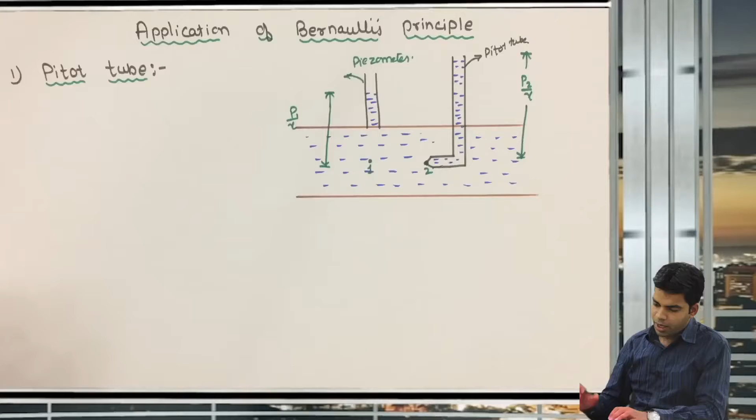At the tip of the nozzle, the velocity is 0, and this point is known as the stagnation point. The piezometer kept here will measure the static pressure head, while the pitot tube kept here will measure the stagnation pressure at this particular point.

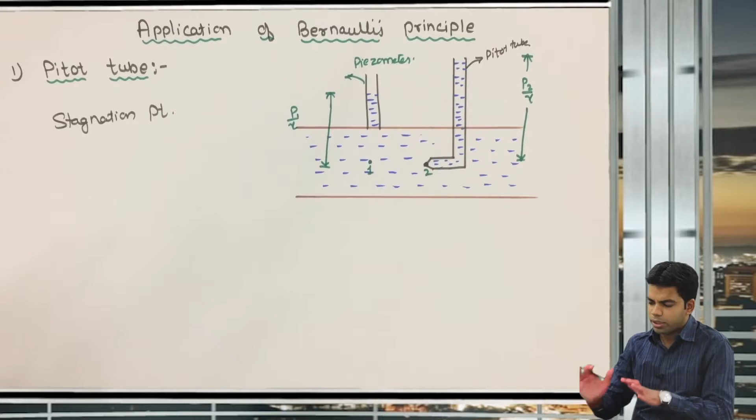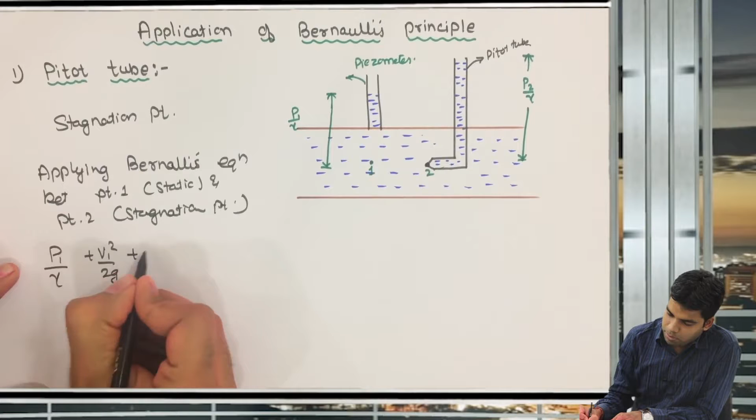Now, how can we calculate the pressure? I will tell you. Applying Bernoulli's equation between these two points, point 1 which is static and point 2 which is the stagnation point: P1 by gamma plus V1 square by 2g plus Z1 will be equal to P2 by gamma plus V2 square by 2g plus Z2.

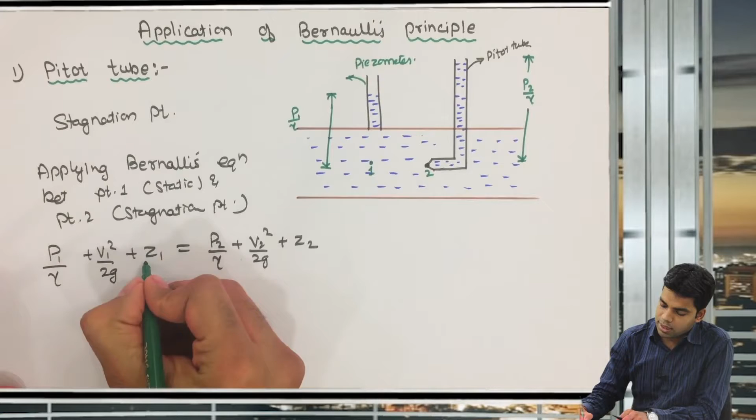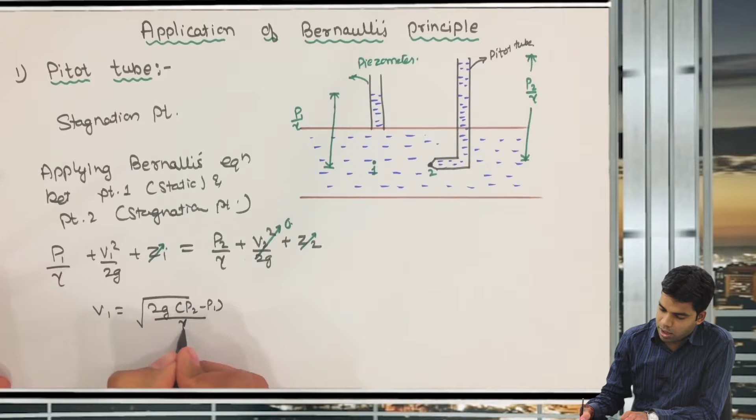Since Z is the same, this will be cancelled out. Second, at the tip of the nozzle, the velocity is 0, meaning V2 will be 0. So we get V1 square by 2g is equal to P2 by gamma minus P1 by gamma, which gives V1 equal to under root of 2g into P2 minus P1 by gamma. This is nothing but the velocity V1.

That means the velocity with which the fluid is flowing at this point is V1, equal to under root of 2g times P2 by gamma minus P1 by gamma. P2 by gamma minus P1 by gamma is H stagnation minus H static, because at this point P2 by gamma is equal to P1 by gamma plus V1 square by 2g.

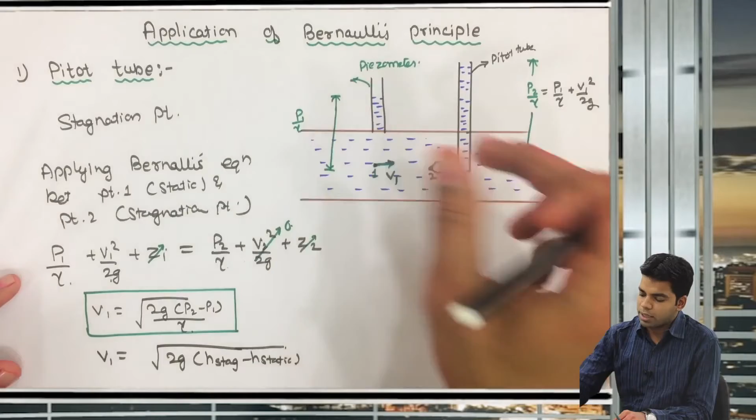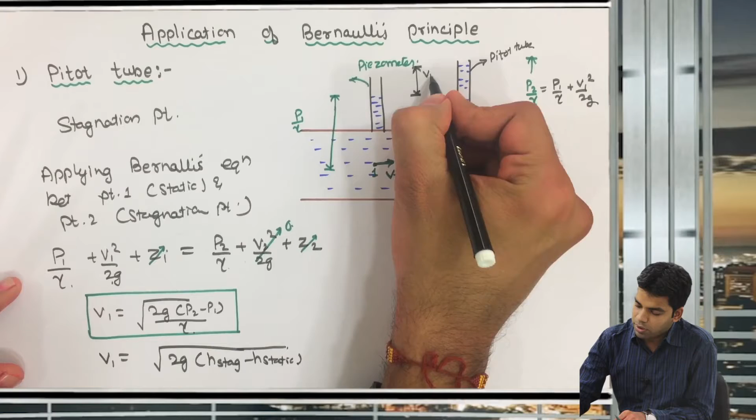This particular height is P1 by gamma, and this is P1 by gamma plus V1 square by 2g. If I subtract this, I get that this particular height is nothing but V1 square by 2g, and this is h. So h equals V1 square by 2g, or V1 is equal to under root of 2gh, where h is the difference of stagnation height and static height.

This is the simple principle of the pitot tube, with the help of which we can measure the velocity. Here we are not considering any loss.

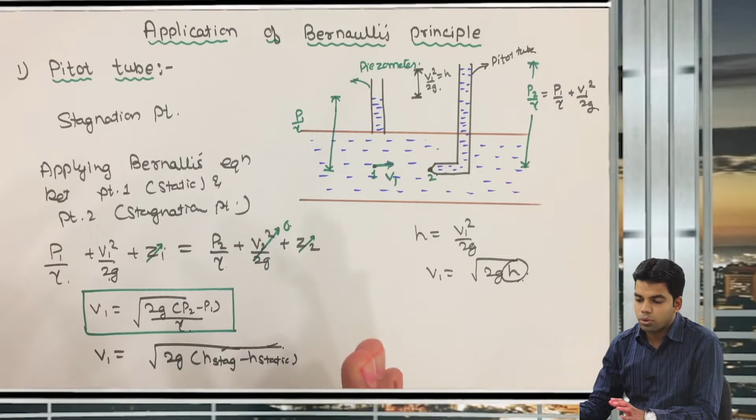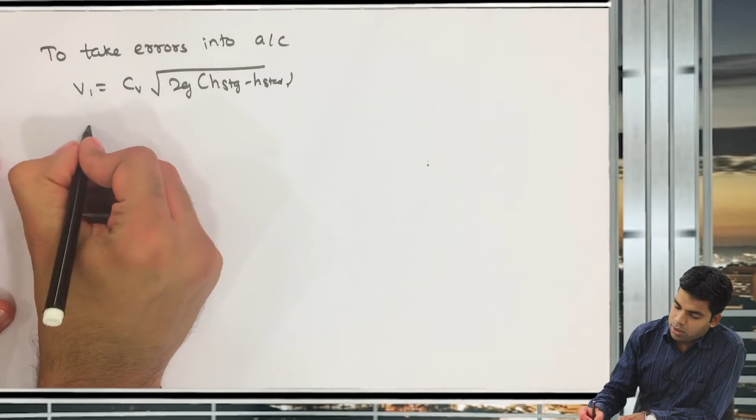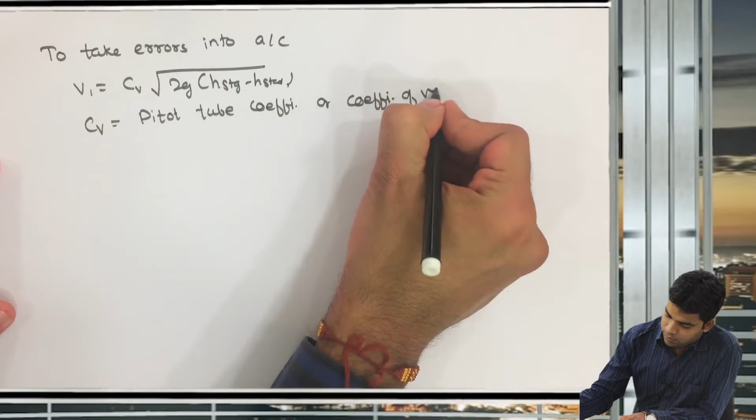If we consider loss, we will have to introduce a coefficient CV to account for errors due to loss of energy. So V1 is equal to CV under root of 2g, H stagnation minus H static, where CV is the pitot tube coefficient, or coefficient of velocity. This H is H stagnation minus H static, or P2 by gamma minus P1 by gamma. This is the simple principle of the pitot tube.

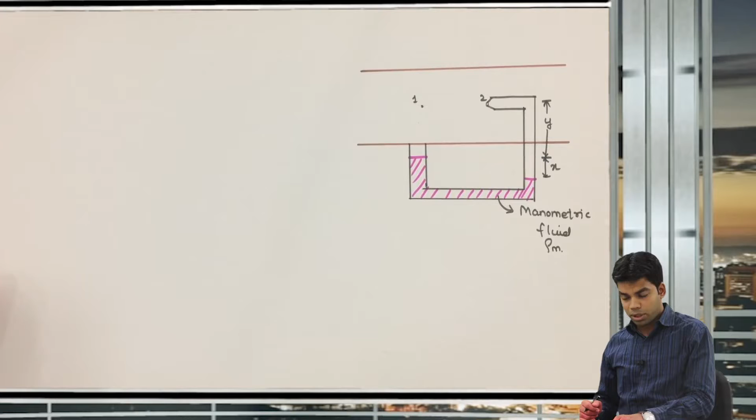Now we will draw another form of pitot tube. This more or less resembles a U-tube manometer, differential U-tube manometer, if you remember. The only difference is that here you have the nozzle where the velocity is getting destroyed, becoming 0. So how can we determine the velocity with the help of this?

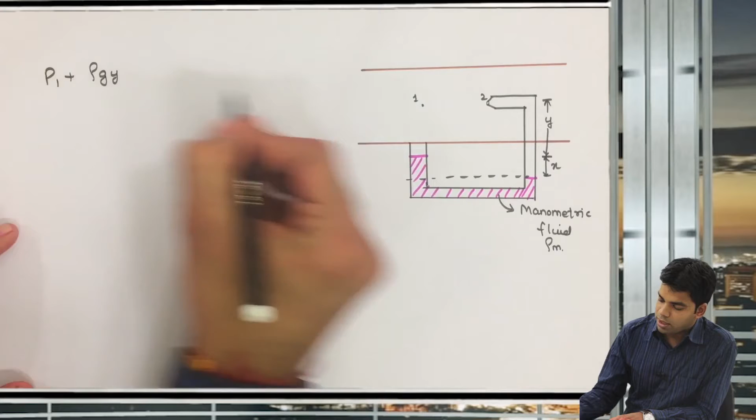We will equate the pressure at this particular level. The pressure here will be P1 plus rho g y, where rho is the density of the flowing fluid and y is the height, plus up to level x with density rho m, giving rho m g x. This equals, at this level, the total pressure P2 plus rho g times x plus y. We have already seen the differential manometer, and here we have equated the pressure at this level.

Now, dividing by rho g, this can be written as P1 by gamma plus rho m by rho into x, which equals P2 by gamma plus x, since the rho g y terms cancel out. Further, this can be written as...

P2 by gamma minus P1 by gamma is equal to x into rho m by rho minus 1. Now further, P2 by gamma minus P1 by gamma, because there is a piezometer, is nothing but V1 square by 2g. So from here you will get V is equal to under root of 2gx rho m by rho minus 1.

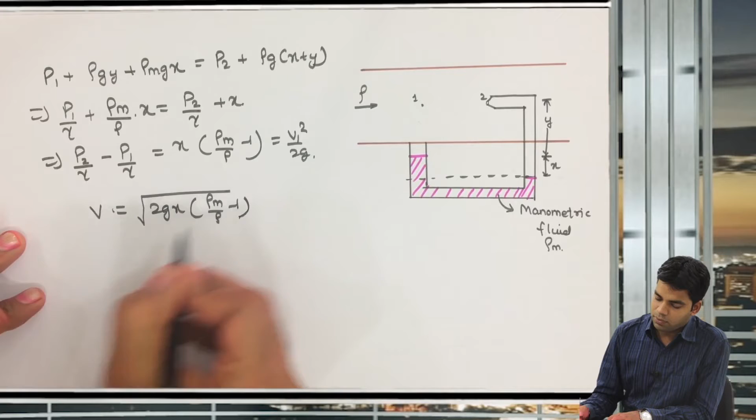Or you can say V is equal to Cv under root of 2gx rho m by rho minus 1, where rho m is the density of the manometric fluid and rho is the density of the flowing fluid. This is how you can determine the velocity.

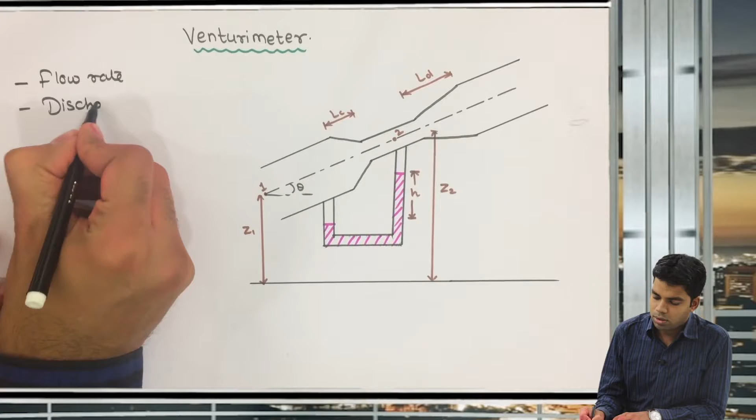Next is a very important application of Bernoulli's principle, that is the venturimeter. This is a very important device, used to determine the flow rate. You can determine discharge or volume flow rate with the help of this venturimeter.

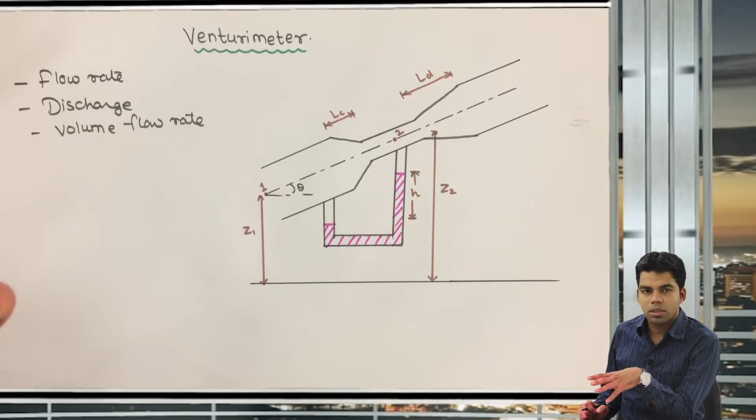Now the beauty of this venturimeter is that it can be used in any orientation, meaning horizontal, vertical or inclined direction. Whether the flow is horizontal, vertical or inclined, it can be measured with the help of this venturimeter.

Second thing, the efficiency of this venturimeter is very high. This is a very precise instrument, the accuracy is very high. Third important thing is the arrangement here.

We have put a U-tube manometer here, and the area of the throat is less, which is to have more velocity here, because area is less here so velocity will be more.

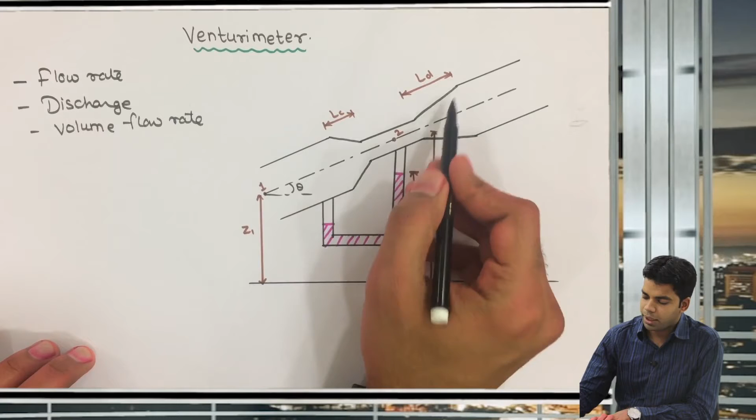Or you can say the cone angle at the diverging side is less, around 5 to 8 degrees, while the converging cone angle is around 15 to 20 degrees.

Now what is the reason behind this? Just understand this carefully. The diverging length is more, cone angle is less; the converging length is less, cone angle is more.

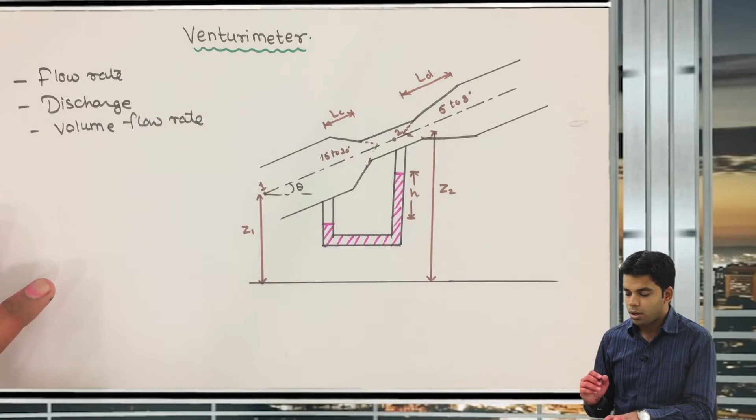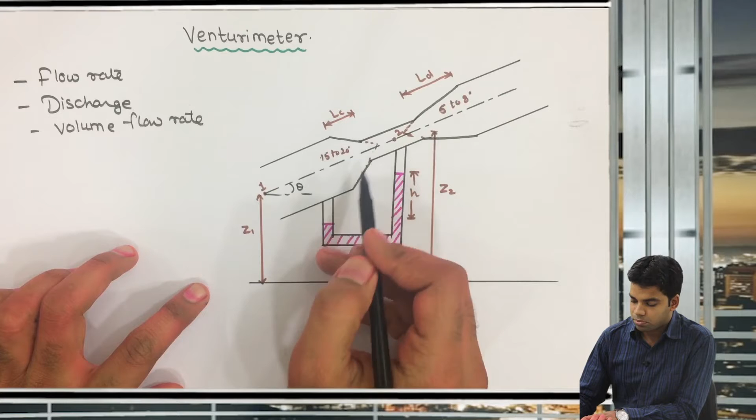There is a difference in pressure, and because of that this manometric liquid will rise here, because the pressure here is less, so the manometric liquid will rise.

Then after that this cone is further diverged up to length LD. Because the cone is now diverging, the velocity will decrease but the pressure here will increase.

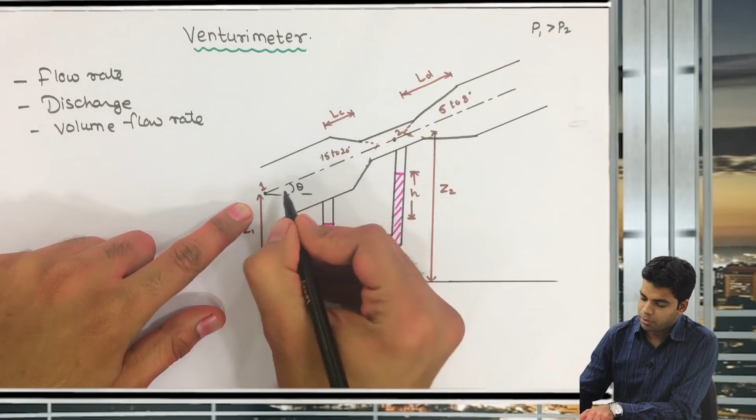So just understand, the pressure at point P1 is greater than that of point P2. The pressure at point 1 is greater than that of point 2.

But the pressure at point 3, if I take point 3 here, is greater than the pressure at point 2, because again velocity decreased so pressure increases in this diverging section.

The convention of flow is always from high pressure to low pressure. So here the flow happens conventionally because the pressure is decreasing, so from high pressure to low pressure the flow can easily happen.

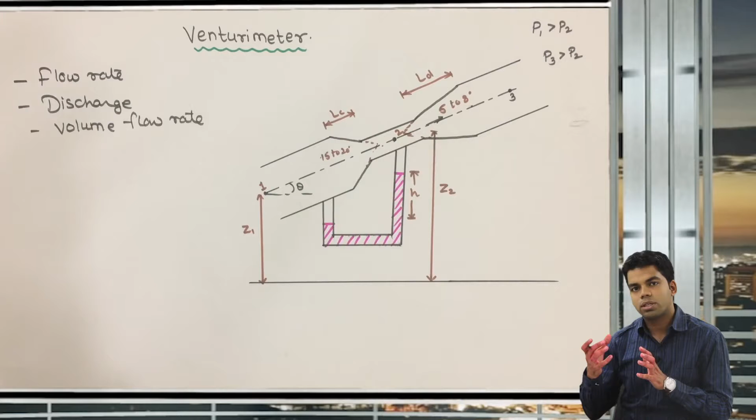The pressure is decreasing in the direction of flow, so that decrease in pressure will further help the flow. But what is happening here is the flow is in this direction, while the pressure in this direction is increasing, yet the natural tendency of flow is from high pressure to low pressure.

So what happens is, because the fluid elements stuck to these particular walls have very less velocity there.

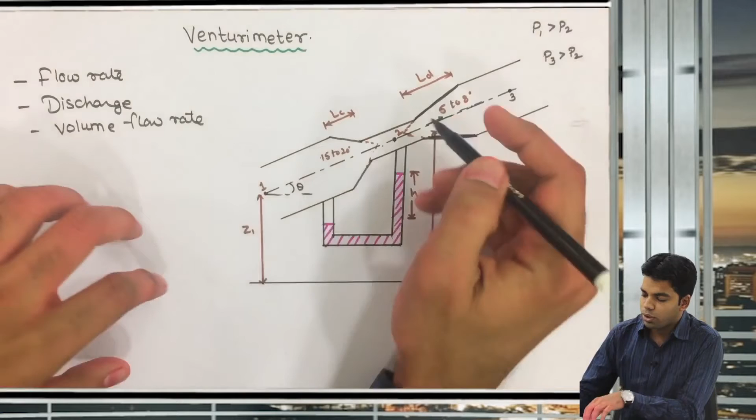The fluid elements passing through the center are having considerable kinetic energy, so they pass through fully. But the fluid elements near the walls have very low velocity, and because of that the flow tendency will be in the opposite direction, since it naturally flows from high pressure to low pressure. At these two points, since pressure is higher at this point compared to that point, the flow will be opposite near the wall of the pipe.

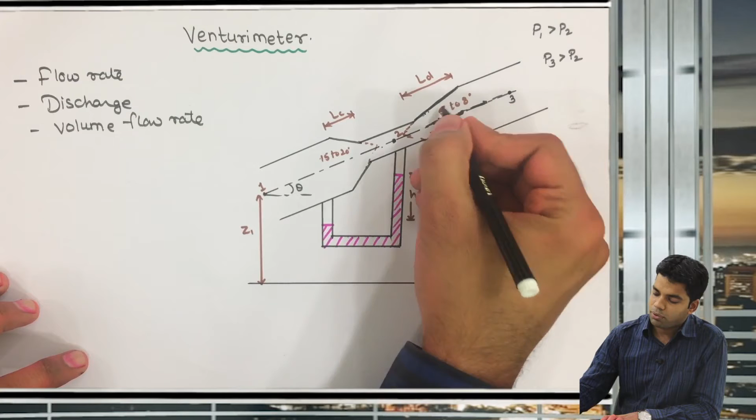The flow in the center of the pipe is dominated by kinetic energy, so it will be in this direction only. But at the walls, where velocity is almost zero, the flow tends to be in the opposite direction, and because of that there is formation of eddies. Natural flow is in this direction, but flow tendency at the walls is opposite.

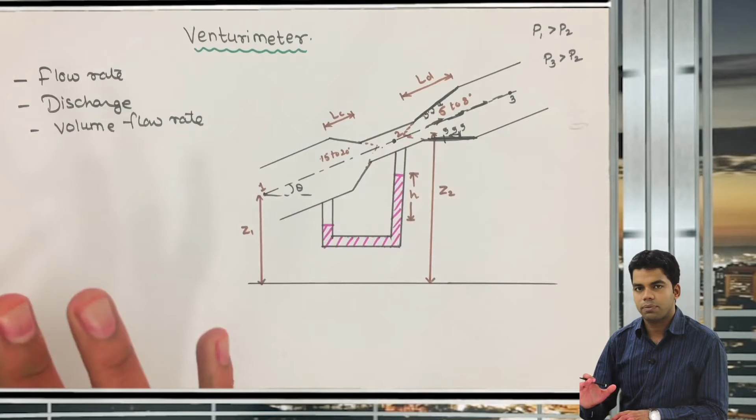So the principle, as I told you, is that we are creating a pressure difference between these two points, and with the help of which we will try to measure the discharge. How? We will apply Bernoulli's principle.

Between 1 and 2, at this particular point total head P1 by gamma plus V1 square by 2g plus Z1, this will be equal to P2 by gamma plus V2 square by 2g plus Z2. Now further you can write it as P1 by gamma plus Z1, minus P2 by gamma plus Z2, this will be equal to V2 square by 2g minus V1 square by 2g.

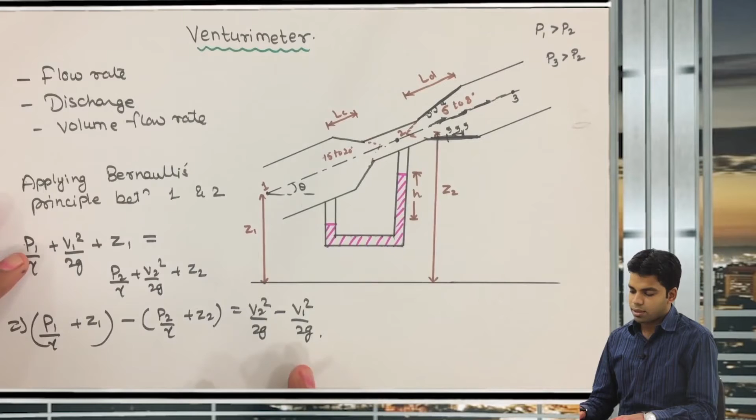Now what is this V2 square by 2g minus V1 square by 2g? This is nothing but P1 by gamma plus Z1 minus P2 by gamma plus Z2, and this is nothing but H1 minus H2. This is piezometric head, so this will be H1 minus H2, or you can write it as H, which is the Venturi head.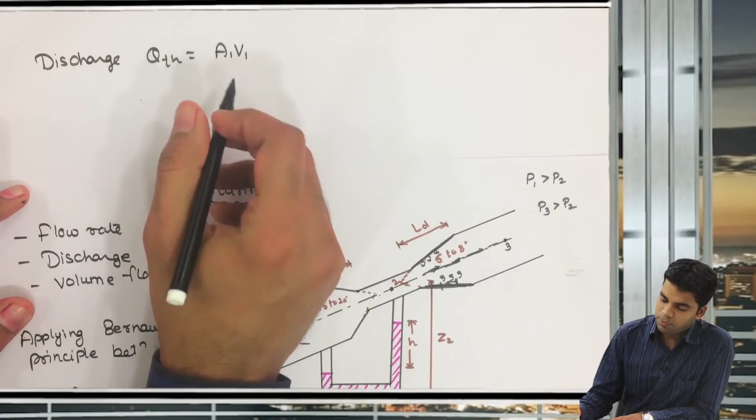Now further the discharge Q, theoretical discharge, this Q will be equal to A1 into V1, area cross section into velocity, or you can write it as this is also equal to A2 into V2. Discharge is same at these two points, so A1 V1 is also equal to A2 V2.

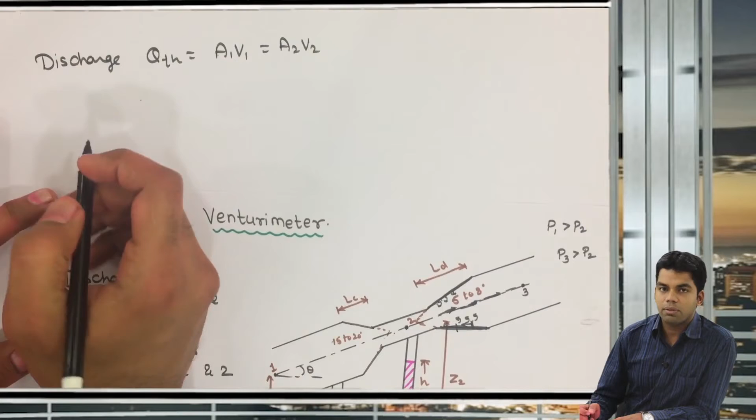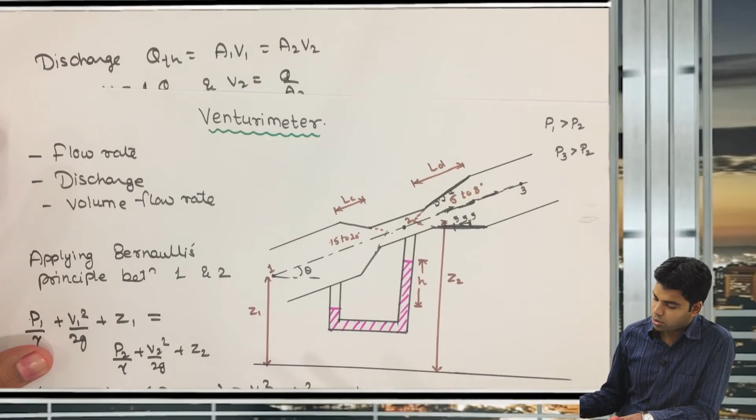Now further this can be written as V1 is equal to Q by A1, and V2 will be equal to Q by A2. Now just put the values of V1 and V2 here in this equation, so we will get H equal to, where V2 is Q by A2 and V1 is Q by A1, this will be Q theoretical square by 2g, and inside we get 1 by A2 square minus 1 by A1 square.

Further this can be solved, and Q theoretical from here will be equal to A1 A2 under root of 2gh upon under root of A1 square minus A2 square. So this is the expression for theoretical discharge.

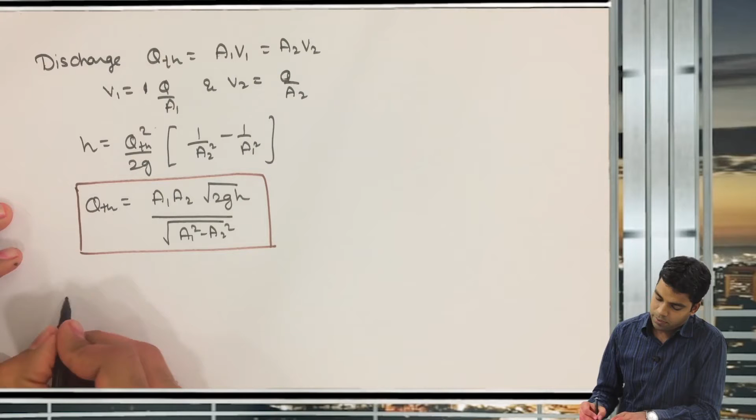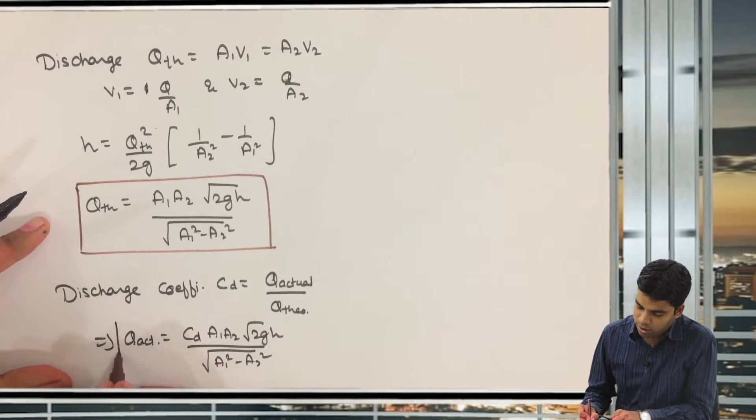Now further there is a discharge coefficient CD, equal to Q actual divided by Q theoretical. There will be a difference between actual discharge and theoretical discharge because of certain losses. So from here Q actual can be determined, equal to CD into Q theoretical, that is CD into A1 A2 root 2gh divided by under root of A1 square minus A2 square. So this is how we determine the discharge with the help of a venturimeter.

And this CD, the value of CD for venturimeter is 0.98, which is the highest for venturimeter. As I told you, this is a very precise instrument.

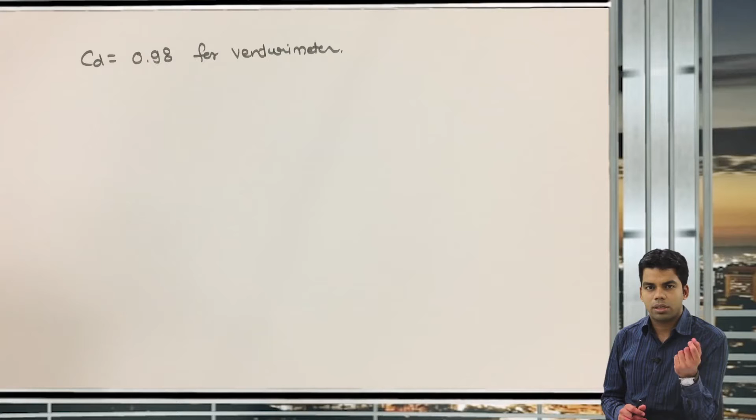There are certain other instruments like orifice meter and rotameter, but the value of coefficient of discharge CD is less there, so those are not so accurate. The venturimeter is very accurate and very costly, while the orifice meter is less accurate and obviously cheaper.

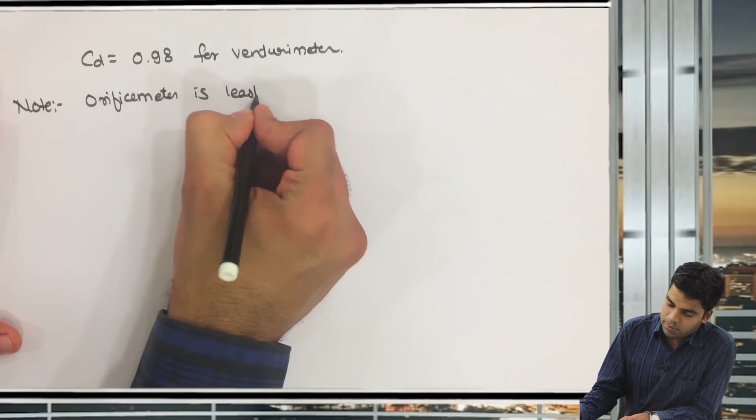So for the orifice meter, you can write down the note: orifice meter is least efficient, with coefficient of discharge CD as 0.6 to 0.7, and these are cheaper.

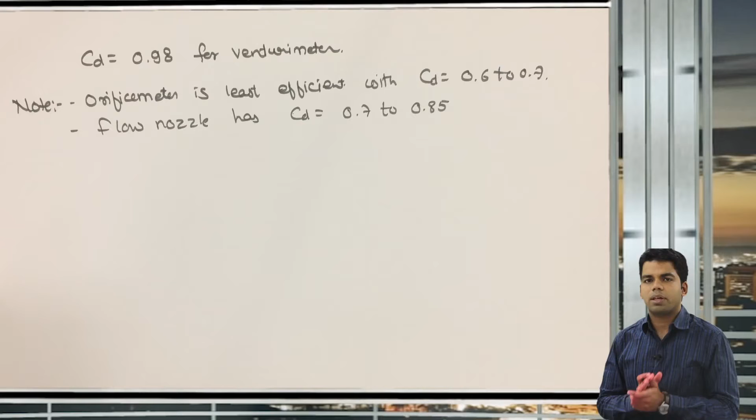Another discharge measuring instrument is the flow nozzle, and this flow nozzle has CD as 0.7 to 0.85. You can see details of the orifice meter and flow nozzle from the book of Modi and Seth. We will not discuss it further since it is not very important from the GATE point of view. Now next, as I told you, the venturimeter is most efficient.

At the same time, it is costly. So the CD, as I told you, here is 0.98.

Next, the rotameter. Another device is the rotameter. This rotameter can be used in the vertical direction. If you want to measure the discharge in vertical direction, you can use this rotameter.

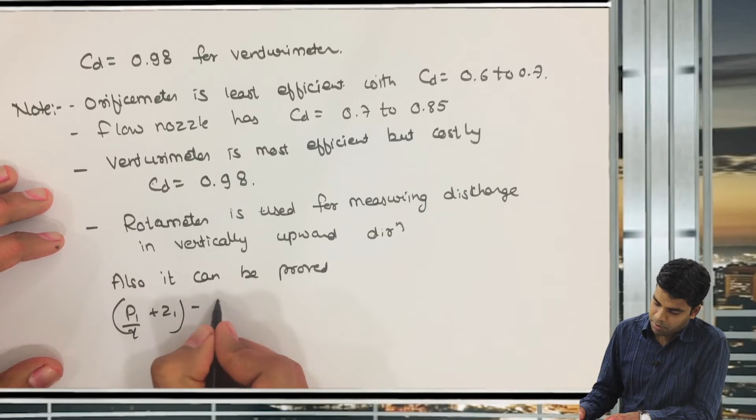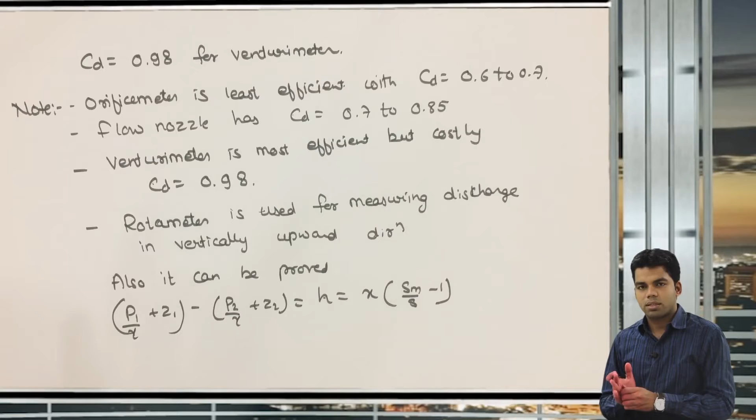Now, this equation which we have proved can also be proved as P1 by gamma plus Z1 minus P2 by gamma plus Z2, this is equal to H, which is also equal to X into Sm by S minus 1. Sm is the specific gravity of mercury, and S is the specific gravity of the fluid. So this is another form for the venturimeter.

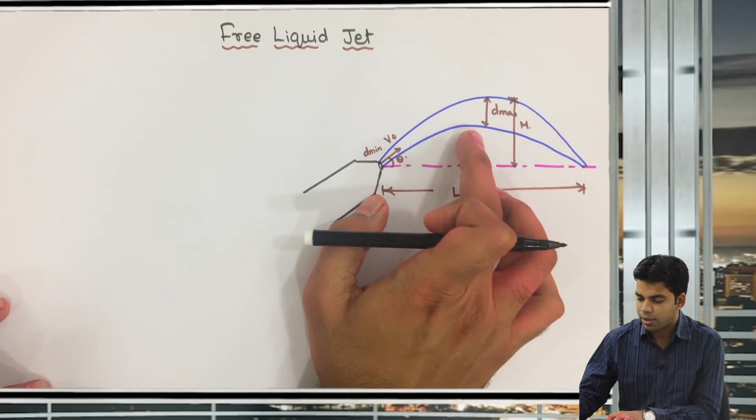Next is the free liquid jet. We are having a jet which is at an angle theta from the horizontal, and it will travel up to a range of length L, and the highest height it achieves is H, as you can see here. We have the minimum diameter of the jet, D minimum, and the maximum diameter at the top, D maximum. So we have to determine the value of L, H, and so on.

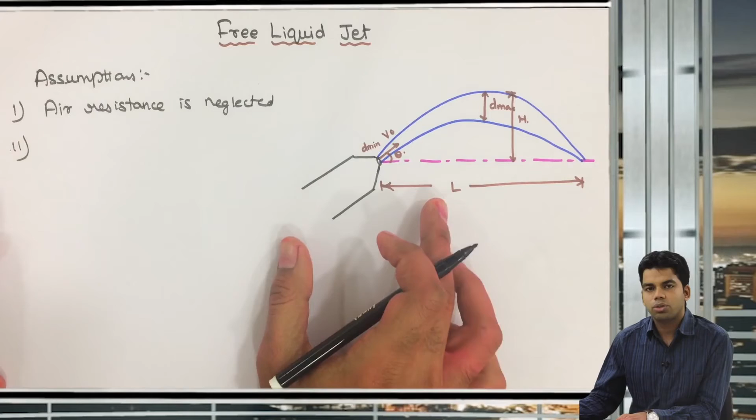So here are certain assumptions. Let us first look into the assumptions. The first assumption is that air resistance is neglected; we are not considering air resistance. Second, the acceleration due to gravity G is constant within the range of the jet.

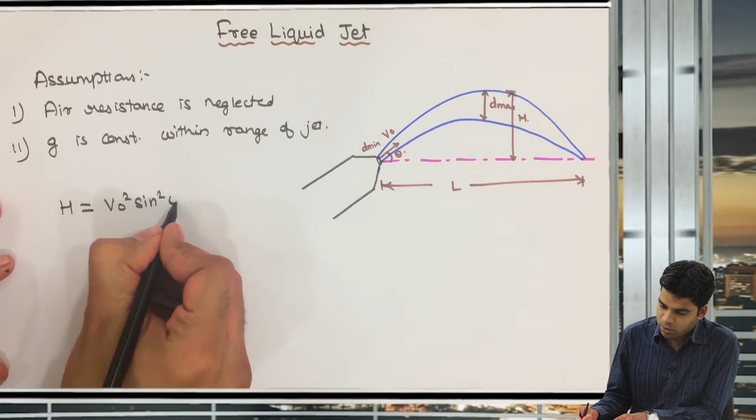The height attained, H, I will directly tell you the formula. This H is equal to V naught square sine square theta divided by 2G. This is the maximum height attained.

Now L, L by 2 is half of the range, and the formula for L by 2 is V naught square sine 2 theta divided by 2G. V naught here is the initial jet velocity, the velocity with which the jet is leaving the nozzle, and theta is the angle with which this jet is leaving.

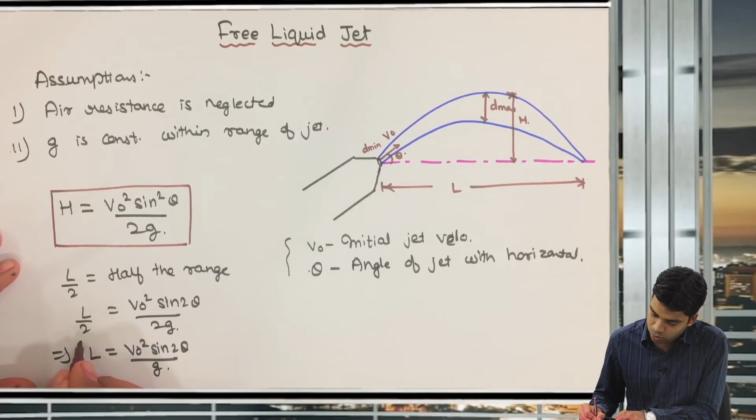With the horizontal. So from here you can get the value of L, the total range, which is equal to V naught square sine 2 theta divided by G. So you have H, which is V naught square sine square theta divided by 2G, and L is V naught square sine 2 theta divided by g.

Now, the horizontal component of this velocity: the velocity is V naught, the angle is theta. So what will be the horizontal component of this velocity? This will be equal to V naught cos of theta.

Now, if I want to determine the time of flight, up to what time this jet will be in the air, for that what I will have to do is: total distance travelled is L, and the velocity in this direction is V naught cos theta. So total distance upon the velocity will give us the time of flight.

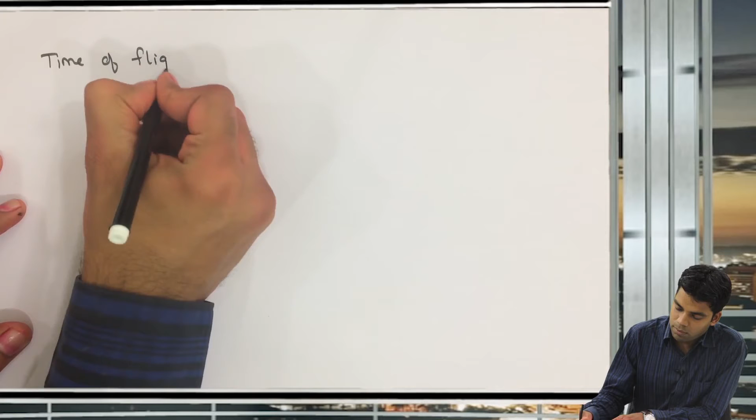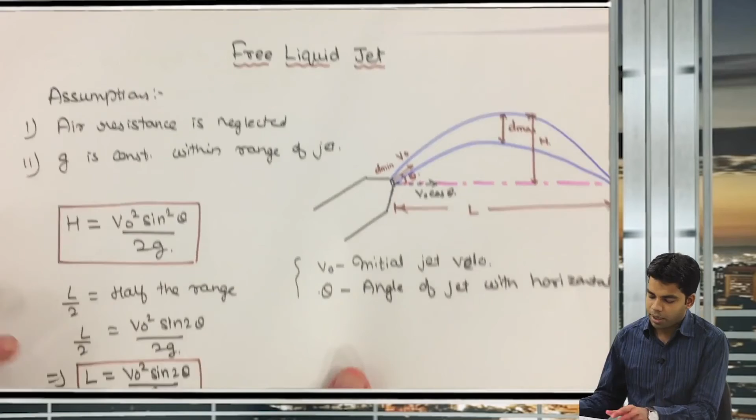So from here we can determine the time of flight. This is equal to the total range L divided by V naught cos of theta. Just put the value: L we have already determined as V naught square sine 2 theta divided by g.

So this will be equal to V naught square sine 2 theta divided by g into velocity in horizontal direction, which is V naught cos theta. So divided by g into V naught cos of theta. From here one V naught will get cancelled out.

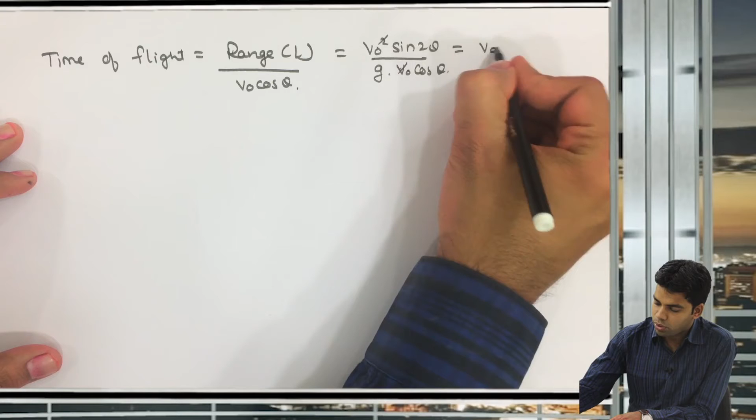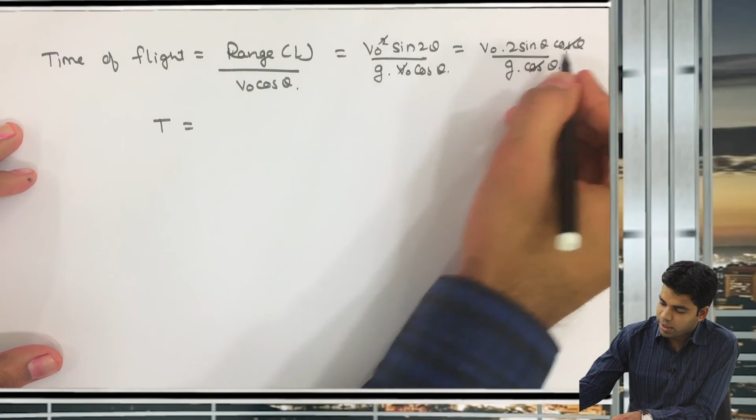Now further, sine 2 theta can be written as 2 sine theta cos theta divided by g into cos theta. So from here, in this time of flight t, cos theta will get cancelled out, giving 2 V naught sine theta divided by g. So this is the total time of flight. So you can note a few things here.

The very first thing we have seen is h equals V naught square sine square theta by 2g. Now in order to have the maximum height, what should be the angle theta? For this term to be maximum, sine theta should be equal to 1. And sine theta is 1 at 90 degrees, as we know, that means theta should be equal to 90 degree.

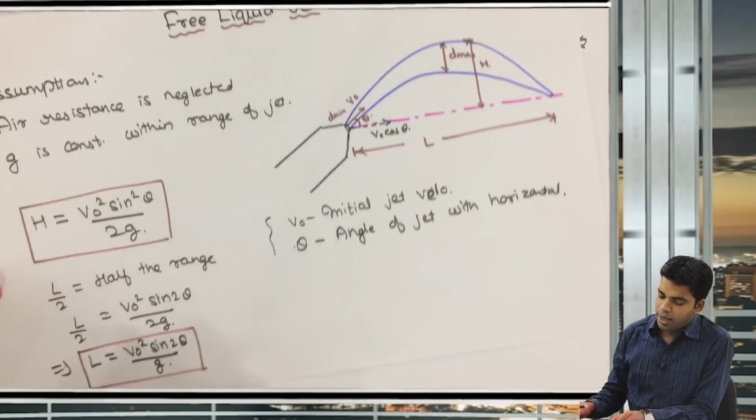That means for maximum height, theta is equal to 90 degree. And this h maximum, when theta is equal to 90 degree, h will be equal to V naught square divided by 2g. So h maximum will be equal to V naught square divided by 2g. Here we are neglecting air resistance, as I have told you.

Now, if we are considering air resistance, then a coefficient of air resistance alpha will be multiplied here. So this H max will also be equal to alpha into V naught square by 2g, where alpha is the coefficient of resistance.

Coefficient of resistance - now what does this mean? Suppose if the air resistance is given as 10%, then alpha will be equal to 0.9, because 10% is resistance, so alpha will be equal to 0.9. So this is known as coefficient of resistance. You can multiply this coefficient of resistance alpha in V naught square by 2g. This will be the maximum height considering air resistance.

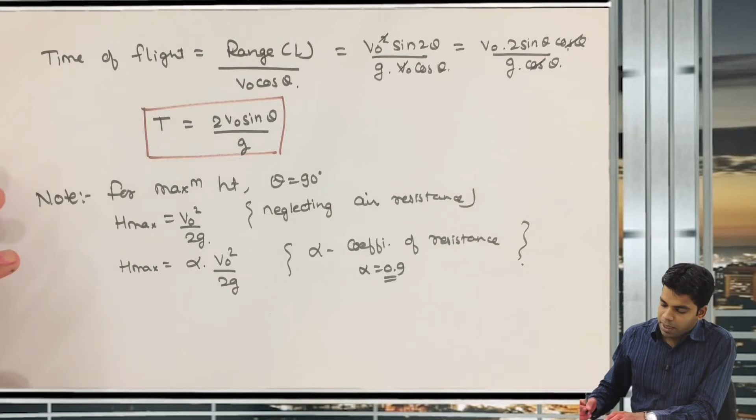Now for maximum range, that means for L to be maximum, what is required? What should theta be here? For this term to be maximum, sine 2 theta should be equal to 1, or 2 theta should be equal to 90 degree, or theta should be equal to 45 degree. 2 theta is 90 degree, so theta should be equal to 45 degree.

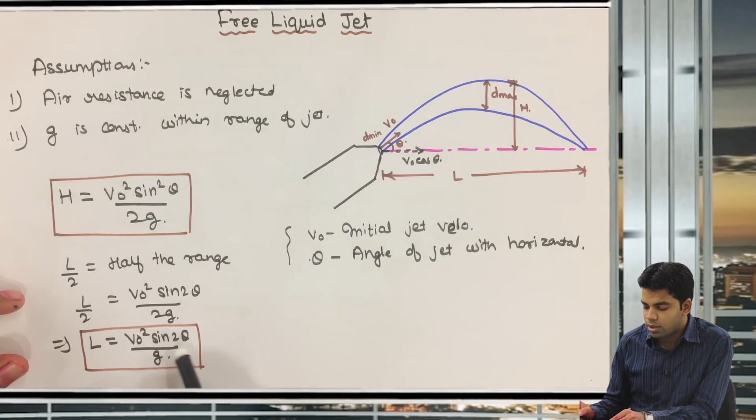So this total L max will be equal to V naught square sine of 2 into 45 divided by g, or this will be equal to V naught square by g. This is maximum range, L maximum. Maximum range occurs when theta is equal to 45 degree. Very important.

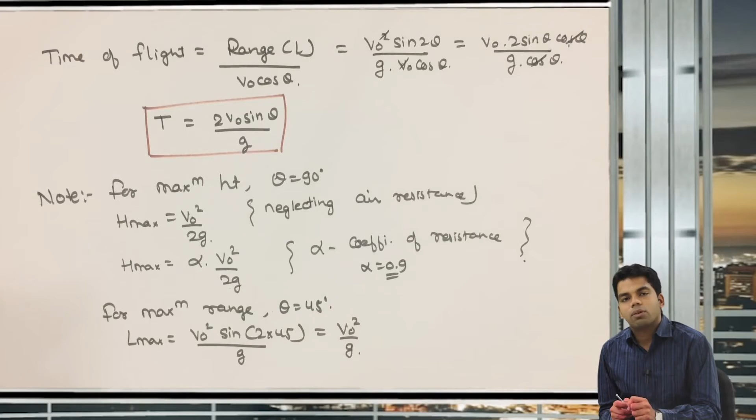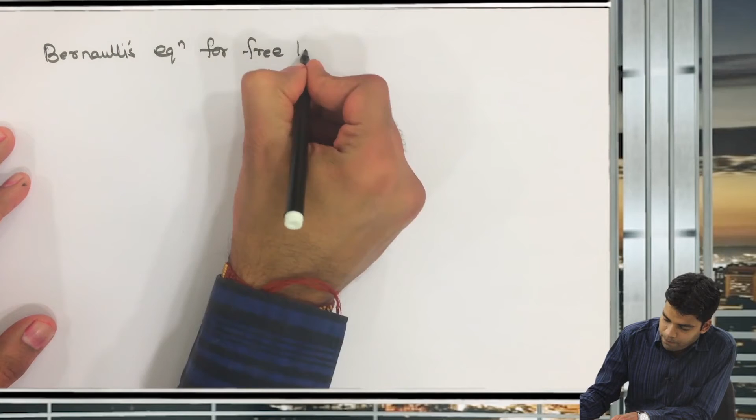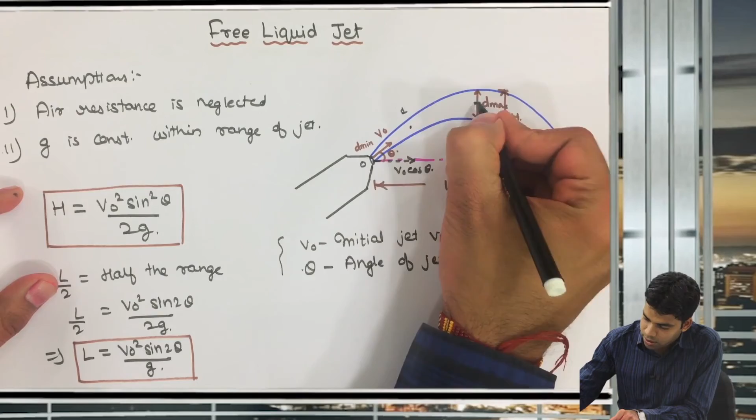We will apply Bernoulli's equation at different points here. Now considering three different points, the point here is suppose 0, here the point we have as 1, and here suppose the point we have is 2. At all these points, obviously the total energy will be equal, so we can apply Bernoulli's equation.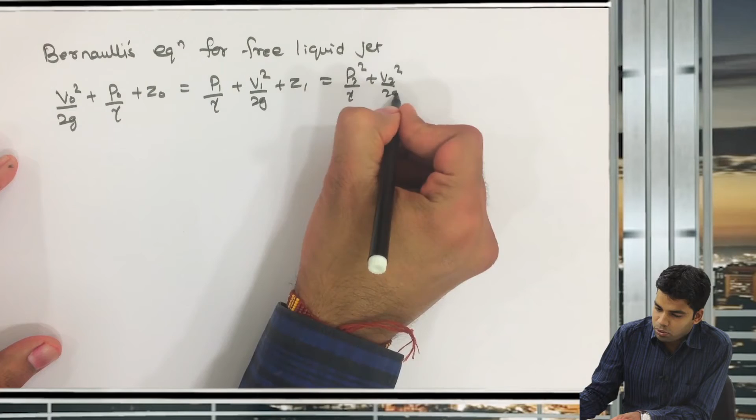So this will be equal to V naught square by 2g plus P naught by gamma plus Z naught is equal to P1 by gamma plus V1 square by 2g plus Z1 is equal to P2 by gamma plus V2 square by 2g plus Z2, and so on.

Now at all these points the pressure is same, which is equal to atmospheric pressure, so the pressure term can be cancelled from here. Finally you will get V naught square by 2g plus Z naught is equal to V1 square by 2g plus Z1 is equal to V2 square by 2g plus Z2, and so on.

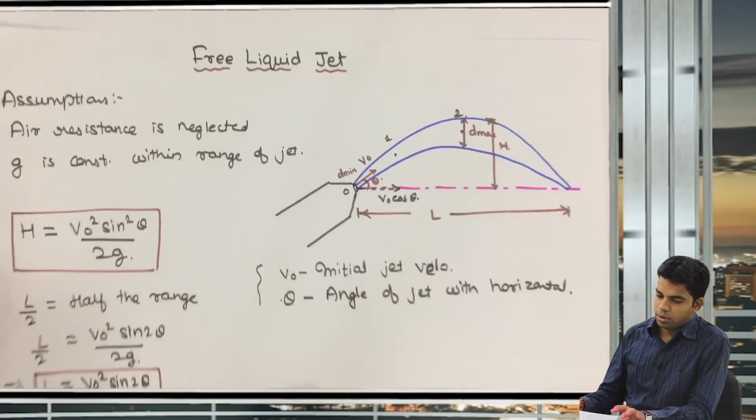Getting this now? Now how can you determine the diameter of this jet? What will be the diameter of the jet now? If you want to determine, suppose this d max you want to determine, or at any point you want to determine the diameter, how can you do that?

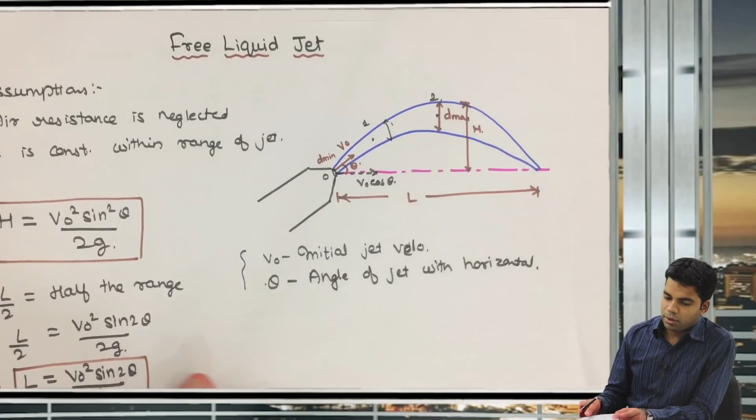If you have the velocities at two different points, you can use the continuity equation to find the diameter. If you have the velocity at one point, suppose at the entry point you have the velocity, you can get the velocity at any height. That means the value of V1 you can determine at any height, that's the first thing.

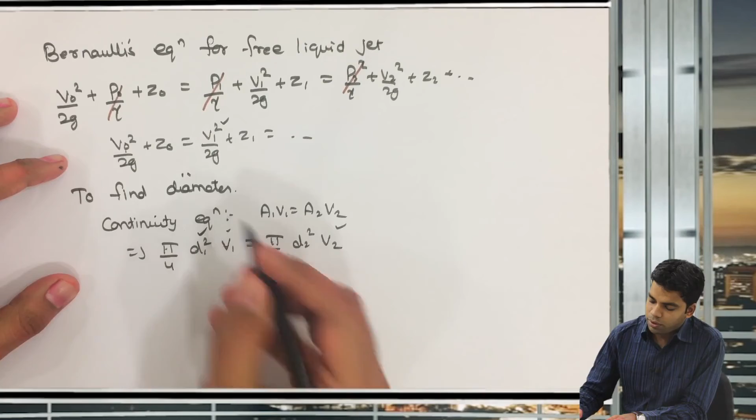Second thing, if you want to determine the diameter of the jet at any point, the continuity equation says A1 V1 is equal to A2 V2, or you can say pi by 4 d1 square into V1 is equal to pi by 4 d2 square into V2. You have the value of V1 and V2, and you have the initial diameter of this jet at this point only, so you can determine the value of d2 at any point.

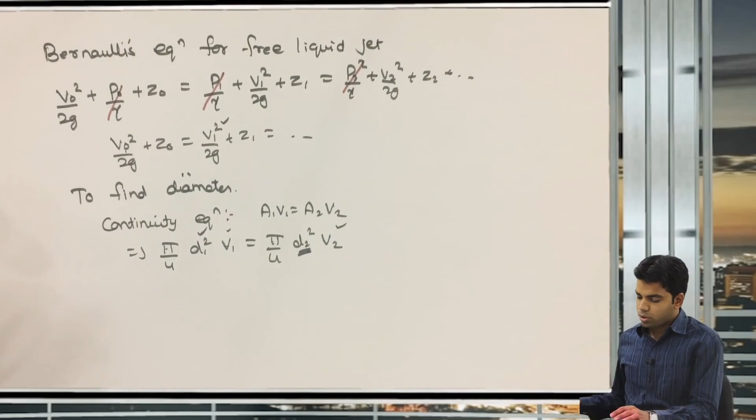Okay, so this is how we can determine different parameters for this free liquid jet. Now we will solve one question on this free liquid jet.

The question says: water is discharged from a 50 mm diameter nozzle which is inclined at 30 degrees above horizontal, if the jet strikes the ground at a horizontal distance of 3.6 meters and a vertical distance of 0.6 meters from the nozzle? What is the rate of flow?

Okay, so we have a jet where the initial diameter of this opening is 50 mm, and it is inclined at an angle of 30 degrees. So this angle is 30 degrees.

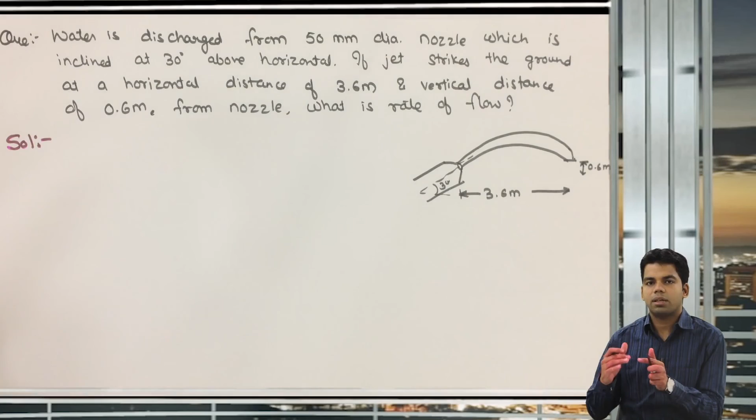Now horizontal distance here is 3.6 meters, and vertical distance from the nozzle is 0.6 meters. That means 0.6 meters below the nozzle level, this water is getting dropped.

Now we want to determine the total rate of flow, Q, we have to determine. Now the velocity, suppose here is V naught.

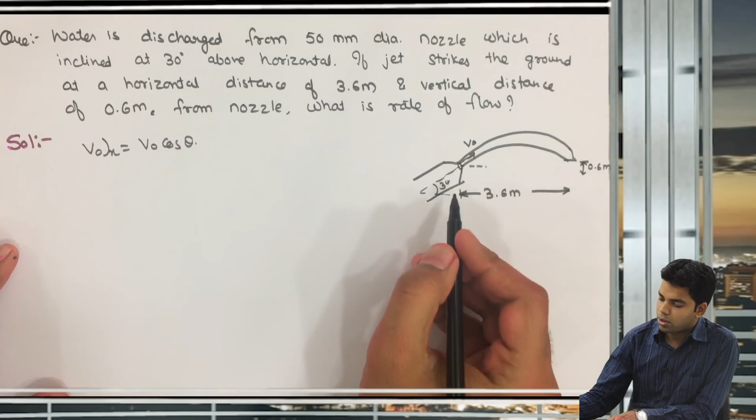The x component of the velocity, V naught x, will be equal to V naught cos of theta. Cos of 30 is 0.866, so this will be 0.866 into V naught.

Now in the y direction, or suppose we consider this as z, V naught z is equal to the velocity component V naught sine of theta. Sine of 30 is 1 by 2, so 0.5 of V naught.

Now in the x direction, the total distance travelled, suppose is x. Total distance is equal to speed in this direction into time. Velocity in this direction is V naught cos theta into t, so x is equal to 0.866 V naught into t. This is equation number 1.

Similarly, distance travelled in the y direction. Now in the y direction, an acceleration, that is the gravity force, is also acting. So for determining y, or z, what we can do is use s equals...

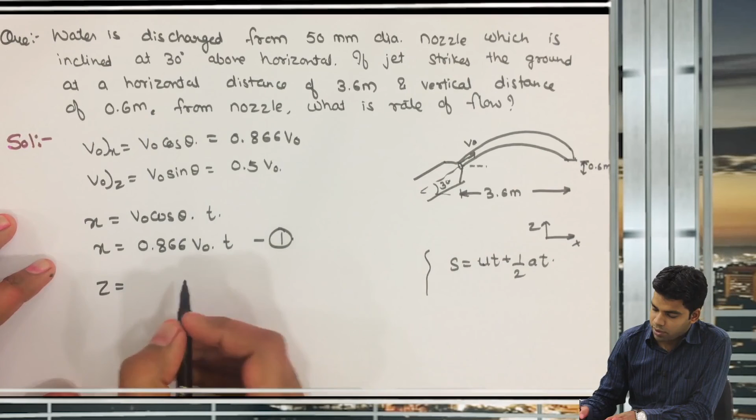ut plus half at square. So here this z will be equal to ut, initial velocity which is V naught sine theta, into t, plus, and because gravitational force acts downwards, minus half of g t square. Or you can say z is equal to 0.5 V naught t minus half g t square.

Now in these two equations, equation 1 and 2, we have the common term t, so we can eliminate t from here. This t will be equal to x upon 0.866 of V naught, and we can substitute this t here to get the value of V naught. Only one unknown will be there, that is V naught.

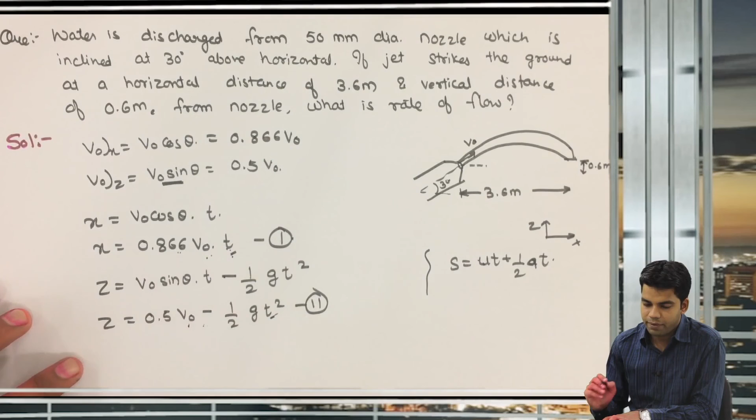So on substituting, you can do it yourself, I will just tell you the final result. From this t equals x upon 0.866 V naught, just put the value of t into the equation, and you get one unknown, V naught. So V naught will be equal to x divided by 0.866, into g divided by 2, into 0.577x minus z, whole to the power 1 by 2.

Now we have the value of V naught in terms of x and z. Now we have the value of x and z: this is 3.6 meters horizontal distance and 0.6 meters vertical distance. That means x is given as 3.6 meters and z is given as 0.6 meters.

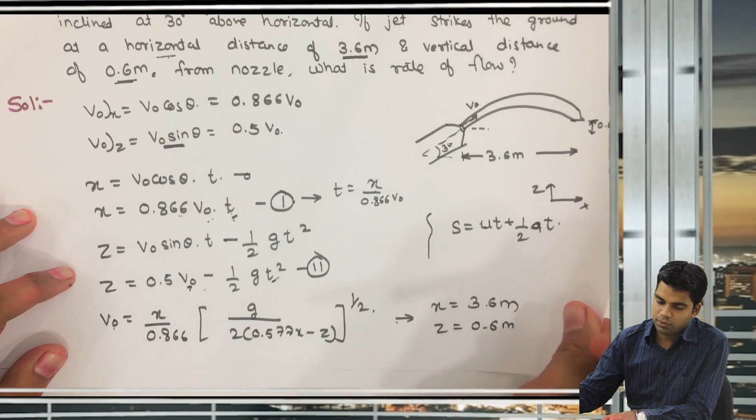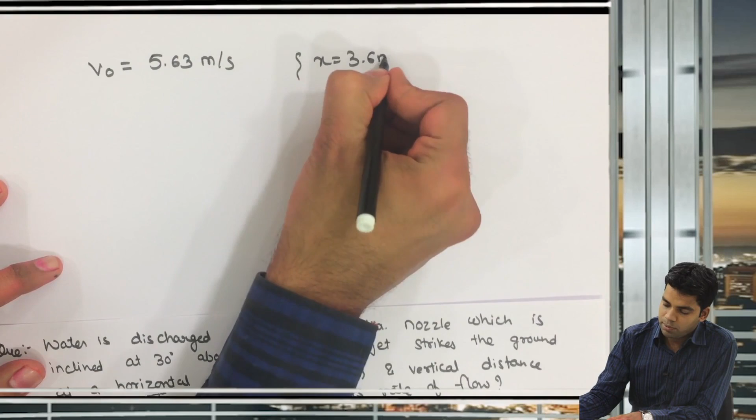So just put the value of x and z in this equation and you will get the value of V naught. So V naught will be equal to 5.63 meters per second, on putting x equal to 3.6 meters and z equal to 0.6 meters.

Now how can we determine Q? So discharge Q is equal to A naught into V naught, which is pi by 4 into d naught square into V naught.

The diameter of the nozzle is given as 50 mm, so this will be equal to pi by 4 into d square, 0.05 meters square, into V naught which is 5.63. So Q will be equal to 0.011 meter cube per second. Answer.

Okay, so this is how we can determine the discharge in this particular question. Clear or not?